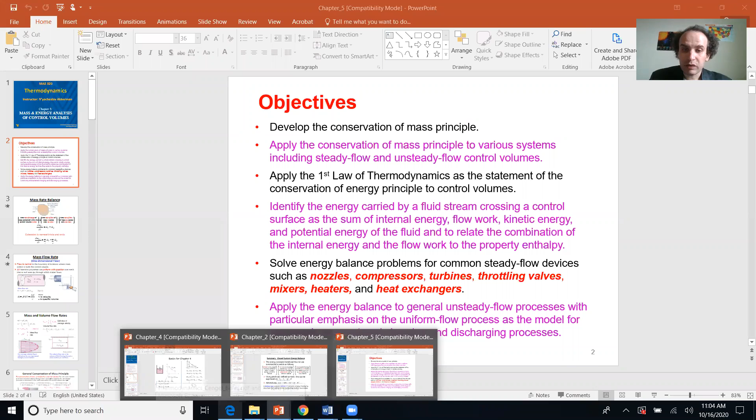So I recall how we ended last lecture. You just finished chapter 4, you just finished homework number 4. What was the major equation in chapter 4? Some people say boundary work, but the major equation was this one: delta E equals Q minus W. The change of energy between two states is heat transfer minus work transfer, or Q over cycle is work over cycle, right?

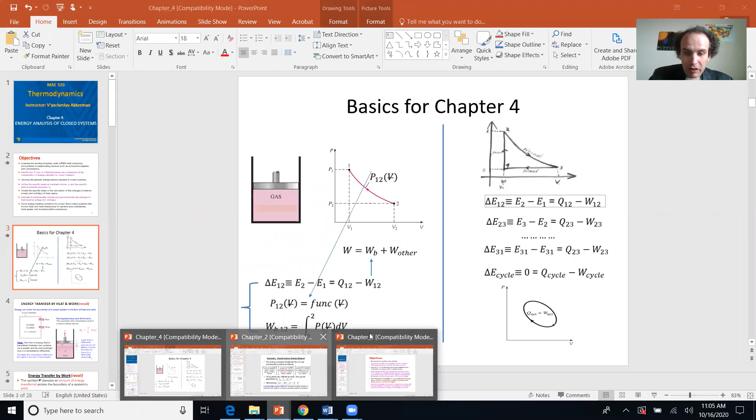Will it be valid for open systems? Now you may remember, if you recall how we came to this equation, this was how the first law was stated. It says that energy cannot be created or destroyed, it can only be transferred from one form to another. So if you have a closed system, the change of energy in that system was heat transfer through the boundary minus work transfer over the boundary, with the sign convention coming with a minus here.

So how did we derive it? We talked about a closed system here. Will it be valid for an open system? No, it will not be valid. So that's what you should realize: for an open system, the first law will look different. So you cannot use this equation anymore until I allow you.

Forget about it. Now we should derive another equation for open systems, which will account for mass transfer through the boundary. Does that make sense? So the key point of chapter 5: forget about chapter 4, forget about this equation. Chapter 5 will be a little bit more complicated, okay?

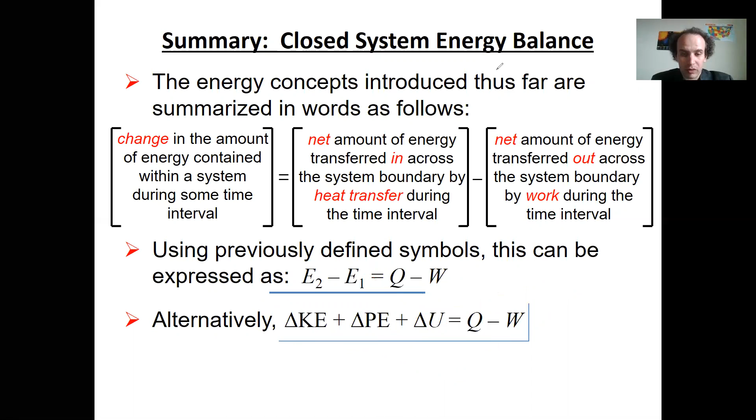Okay, so that is our objectives for chapter 5.

We need to develop the first law and employ it for control volumes for open systems. We should see how this equation will look like, and what will be moving. If you talk about an open system, it means something goes in and something goes out—it will be moving flow. So we should know how to deal with this moving flow. What will be boundary work here? What will be heat transfer? What will be flow work? What will be kinetic and potential energy? So we should arrive at some counterpart of the first law.

I'll tell you in advance that the key parameter in this chapter will be enthalpy. You already dealt with enthalpy, right? It's U plus PV, and you know why we introduce enthalpy. But now enthalpy will become your primary parameter because it's a combination of internal energy and flow work. So actually the first law will be a balance of enthalpy. I'll talk about it—not entropy, enthalpy still. In the next chapter it will be entropy. Now we talk about enthalpy, and this will be your key parameter.

So what are we going to do? Now I will go through simple things. First I will talk about something very silly, very trivial, but gradually it will become harder and harder, and it will be something very difficult. So please don't sleep, focus, and listen to me.

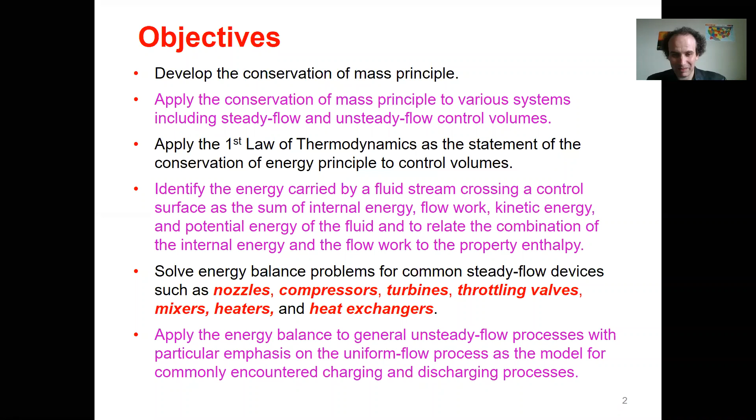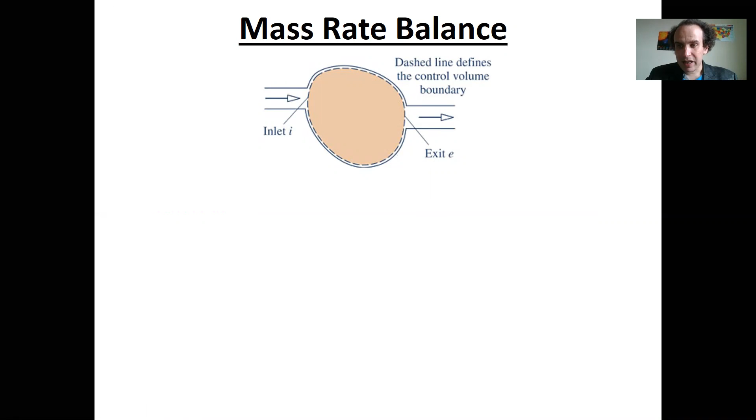So we will talk about open systems. What is an open system? It's something like this: you have a system with some inlet and some outlet. Well, I may have many outlets, many inlets. So I want to write a balance equation of mass and a balance equation of energy for it.

And what I will say here—again, in this class we say that mass is conserved, meaning mass cannot be destroyed or created. It's not nuclear physics; here mass is fixed.

So we say the time rate of change of mass contained within the control volume is what? It's the rate of mass which comes in and the rate of mass which comes out. So I can write it like this. Do you understand this formula? The dm over dt, with subscript CV meaning control volume—that's what we deal with in this course. It will be m dot i minus m dot e. Everybody remembers what m dot is? It's mass flow rate, the amount of mass propagating in and out through a unit of time.

Remember, in typical physics and engineering, we deal with flow rates. There's no reason, when you talk about moving flows, to talk about the mass of the Monongahela River. But there is a reason to say how much water propagates through Morgantown per day, or per any unit time. So that is m dot, mass per unit time, in kilograms per second or whatever.

So what I say here is very simple. Let's say, typically if you're in an in-person class, I would say: how many students do we have in the class? You may say, okay, in the room we have like 70 people. Now let's assume I want to monitor how many people I have in the class each second. What should I do? There are two options. One option is that every instant I just recount all of you. But there's something easier. What I can do: I know I have 70 people in the class.

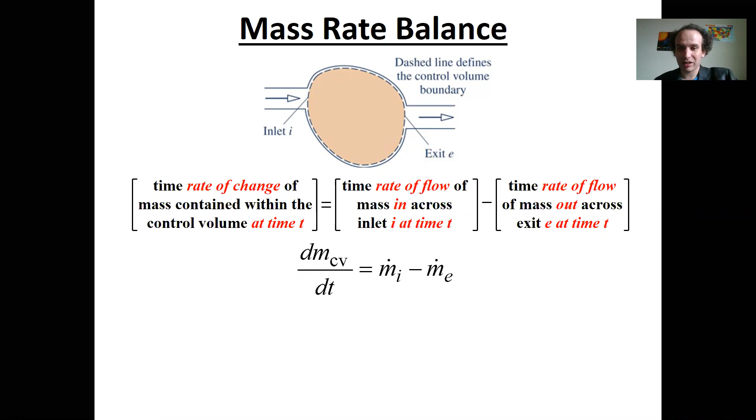But that's what we talk about with mass—mass is not generated or destroyed. So that's what we say: if you want to know how the mass of your system changes, you should account for what comes in and what comes out. And of course, if you have many inlets and many outlets, it will just be a summation over inlets and outlets.

Does it make sense? So in this class, in this chapter, subscript i means inlet, okay, subscript e means exit. Sometimes we'll use subscript o like 'out'—in and out, in and exit. Is it trivial so far? Any question about this?

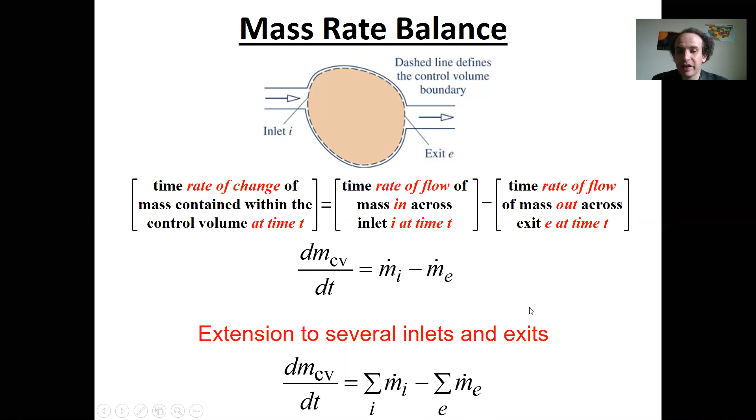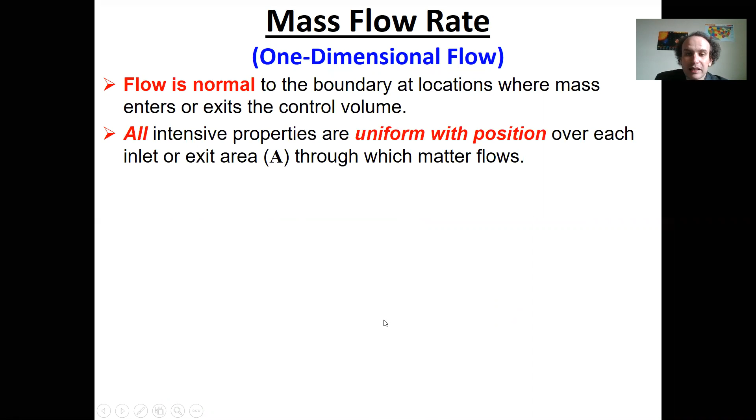This is the differential form of this equation. Let's recall what mass flow rates are. If you talk about one-dimensional flow, like a pipe, remember what mass flow rate is - this was in chapter 2. Mass flow rate is density times volumetric flow rate, which will be average velocity times cross-section area. Do you remember this formula? If I have one inlet, one outlet, you remember. Excellent. If you don't remember, go back to chapter 2.

If you have one inlet, one outlet, m dot will be conserved, while volume should not be conserved - in fact you have compression and expansion. Another way to write this is A times V divided by specific volume. So far it's trivial, I believe. And definitely the energy which is transferred, E dot, will be m dot times specific energy.

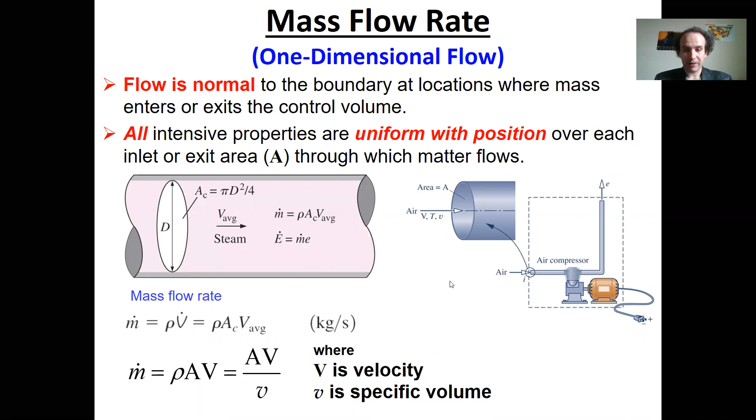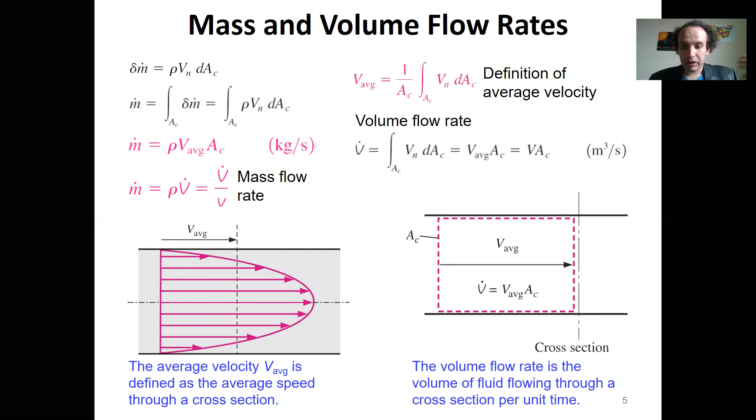Now, if you remember volumetric flow rate, there is the so-called Gaussian theorem or divergence theorem, which tells the same thing: that a surface integral can be coupled to a volumetric integral. This is physical, but mathematically it's much simpler. It's good if you take a fluid mechanics class or advanced mathematics class - sometimes they tell you that you can convert a surface integral into a volumetric one and vice versa. But you may see that what we say here is quite simple.

So let's assume you have a bath here with water. Some water comes in and comes out. What does our conservation of mass simply state? It should be trivial for any student who knows mathematics. What is the left-hand side here? What is this integral? This integral is the change of mass per unit time of water in this bath. And what is this integral? This integral is how much water propagates through the boundaries, through the tube and through the exit, plus and minus. Together they give you 0, because mass cannot be destroyed or generated.

So what we say here is that mass cannot be created or destroyed. The change of mass inside the system equals what comes in minus what comes out. Coming back to my example about students in the class: the change in the number of students in the class equals the number who drop the class, minus that, plus the people who enter the class belatedly.

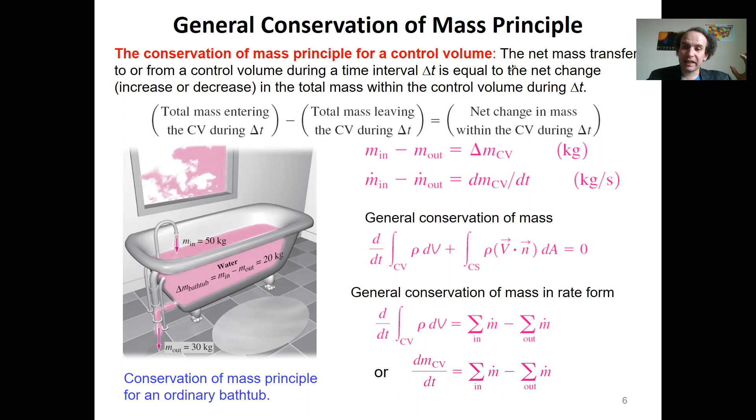Otherwise, if this term is not 0, then your system is unsteady and it changes. Unsteady systems which depend on time we call transient - transient means time dependent. So if you have a transient system, you can take this equation and integrate it over time, and you'll get this: integrating in time by dt, mass of my system at time t minus mass of my system at time 0 equals this.

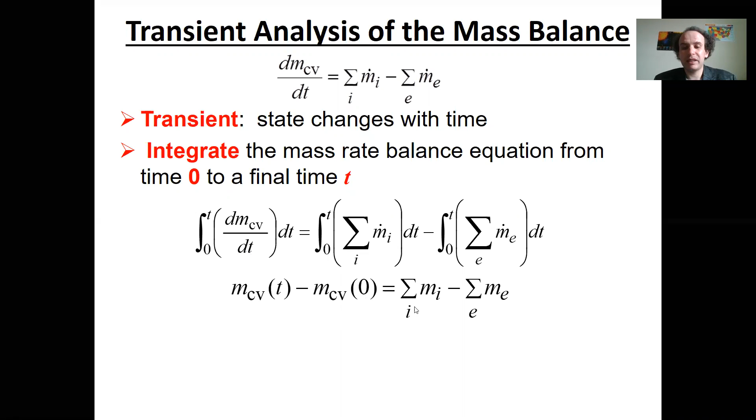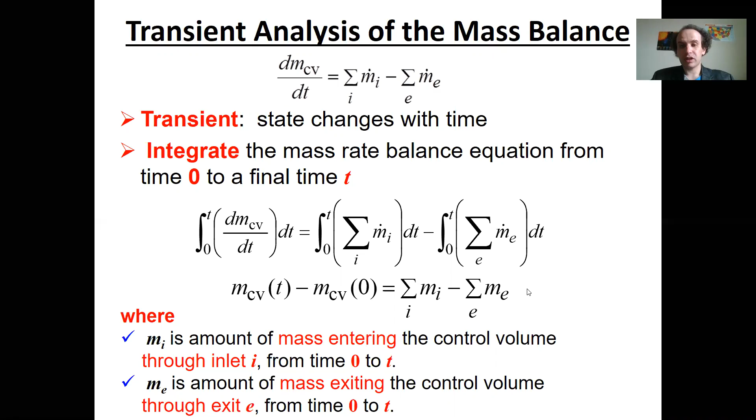It's a summation. Again, if I have a steady system, the left-hand side will disappear. Most of the systems we deal with are steady - otherwise they would explode. Turbines, compressors, they should be steady because you have many rotations per time. If they were unsteady, they would overheat. So most likely we'll deal with steady systems, but not all the time. In the last problems of your homework, there will be systems which are not steady.

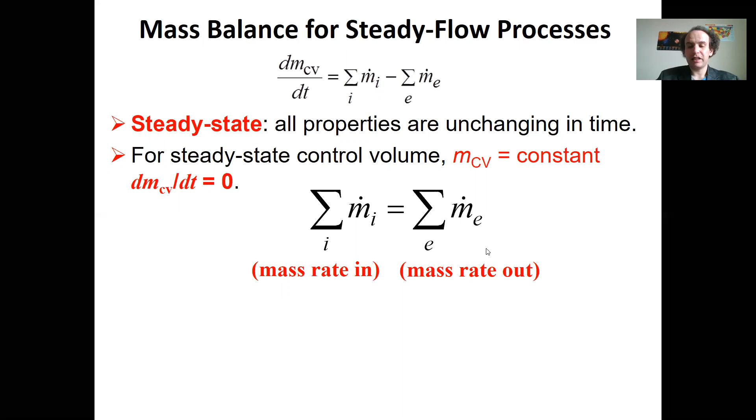So again, if I talk about a steady system, what does it mean? It means the left-hand side here is 0, as I discussed. So we don't have this left term, which means this will be my mass balance equation. If I have many inlets, many outlets, I have it like this.

Right? Does it make sense?

For example, if you have mass balance for a steady flow, classical example, let's say I have a system like this. It's a classical mixer. Assume you take a shower and you have hot water and cold water and you want to balance them to make a reasonable temperature for you. So here is one flow with mass flow rate of 2 kilograms per second, and here is 3 kilograms per second, another flow rate. So you definitely understand that the outlet will be 5 kilograms per second, the summation. So what we say here, it's just mass balance.

Because what goes out should be equal to what goes in. Otherwise, if it's not steady, the amount of water inside will grow or disappear, and it will be unsteady. Does it make sense for you?

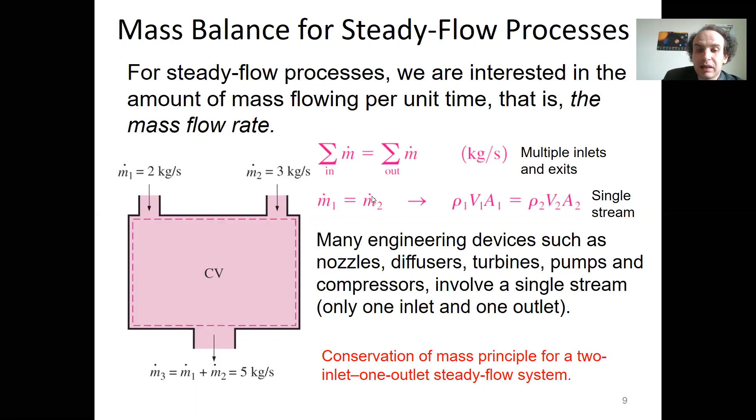As it should be. But if you have incompressible systems, like liquid water for instance, then definitely volumetric flow rate or density will be the same. As long as density is constant, volume is also conserved.

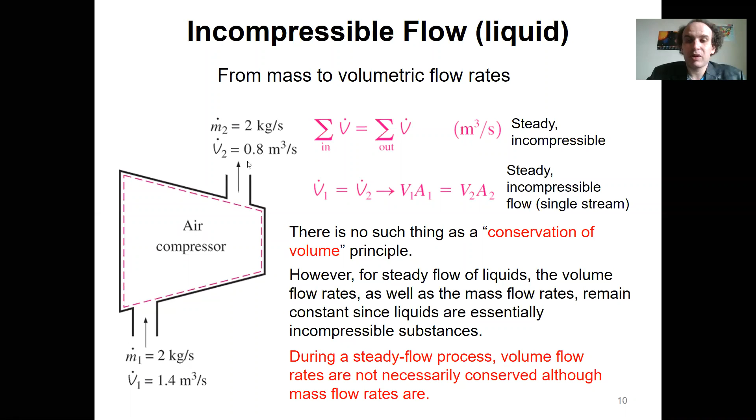But if you buy a balloon or some kind of vessel with gas, gas occupies the entire volume. So if you buy 1 gallon of hydrogen and spend some amount of it, you will still have 1 gallon of hydrogen, because it will occupy your volume. Hydrogen is expanding, so mass will be conserved, volume will not be conserved, right? Is it trivial what I talk about?

I hope so. Another point, remember the concept of flow work or flow energy, PV. What is this term PV? I recall it again because sometimes it's really not easy to understand. I am explaining this term.

Assume like now we are lucky if you want to drink water, you go to the kitchen or bathroom, open the crane and you will have water there, right? But somebody brings it into your home. There is pressure abundance in your pipes, in the canalization system, in the piping system, in the plumbing system that moves it to your home. Imagine you don't have water in your home. What should you do? Then you should go somewhere outside to some source of water, take a vessel of it and bring it home.

And then you should take it out from home. Do you understand that you should produce some work for it? If I ask you, here I have a vessel with 10 liters of water, please help me move it out, then we should take it and bring it out. Do you agree that we should produce some work to push it out? Do you agree that somebody produces work to bring it here? So now you may realize that when you open your crane and water flows there, somebody did this work to bring it here. Do you agree? This is what we call flow work. This is the work associated with moving flow. And this work is equal to PV. This is the PV term. It's important for us because it will form enthalpy.

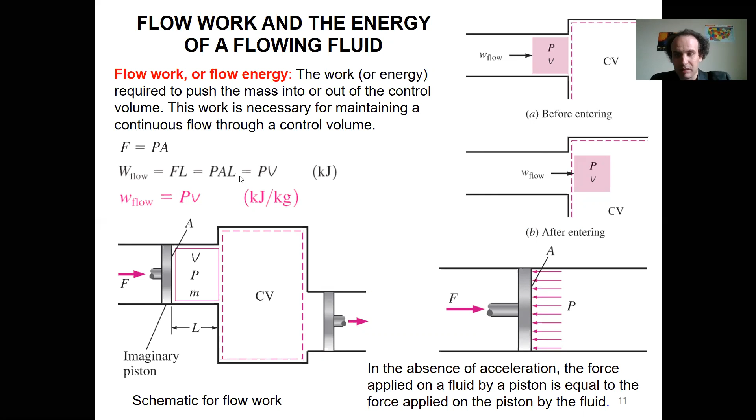So now let's compare what we discussed before. When you consider non-flowing fluid, fluid at rest, remember what mechanical energy consists of. It's internal energy, which we call U. Here we talk about specific values - they are small values, but if you multiply by mass, you get total values. So this is internal energy, this is kinetic energy - specific kinetic energy - and this is potential energy, remember chapter 2. So this is for non-flowing flow.

Now for moving flow, for flowing fluid, in addition to those terms, you will have flow energy or flow work, which is PV. Please realize that on one hand this is related to the process, but on the other hand it's a property, because P is a property and V is a property. If you multiply by mass it becomes capital PV; per unit mass it's small v. So this value theta is the mechanical energy associated with moving flow.

So do you agree that this value theta is the counterpart, the analog of E, for moving flow? Do you agree that this is for flow at rest and this is for moving flow? So we have this term PV there.

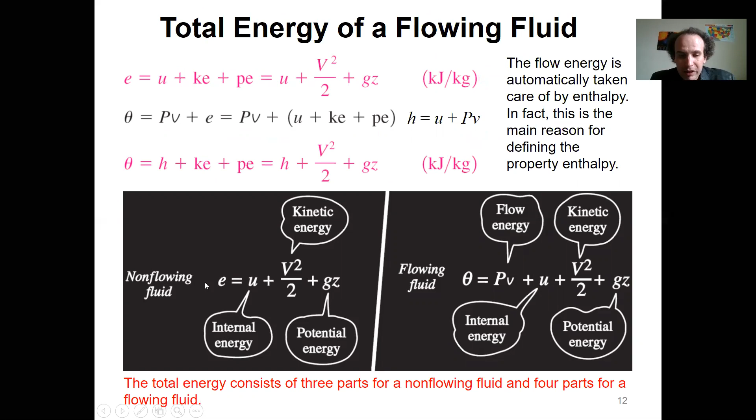So that's what I say here: you realize E is specific mechanical energy of flow at rest, and theta is its counterpart for moving flow. Now, if I multiply both by m dot, what will I have? I'll have the value for moving flow - the actual energy of moving flow, which will be m dot times theta. This is the amount of energy transport, and this is the amount of energy transport per unit time.

And I recall again that we mostly talk about the second equation, because there's no reason to talk about the first. If I ask you what is the energy of the Monongahela River, you don't know what I mean by energy. But if I ask about the energy of water in a hydropower plant, and what energy is generated per unit time - its power - then it makes sense to calculate. It will be m dot multiplied by h. Do you understand this?

Please ask me something. Also, you will realize in this course, and I'll tell you in advance, that very often the term h will be much higher than these other two terms. Very often we will neglect kinetic energy and potential energy. Now I want to tell you something I'll repeat many times - there's one more classical mistake that many of you may make. Here we have three terms: specific kinetic energy, specific potential energy, specific enthalpy.

What are the units of this value? Where do you typically get units for this? What is the unit for enthalpy? If you open tables, you'll see enthalpy is in kilojoules per kilogram, correct? Kilojoule per kilogram, okay?

So what am I going to do next? Next, I am going to show and derive the first law of thermodynamics for open systems — energy conservation for an open system, for a system with moving flow. Very similar to what you did for a closed system, but with other terms now. So to do it, I will talk about energy balance, energy rate balance.

So what will be here? Let's say I have my system — this is my control volume, this is my inlet, this is my outlet. And we realize here that mechanical energy goes in and out here, right? So now I will say: what is the rate of change of energy in the system? It will be heat transfer through the boundaries, minus work done by the system, work transfer.

And up to this point, I'm still exactly where we were in chapter 4. But also, so we have this term. If I don't have this term, do you agree that up to now I am in line with chapter 4? What happened so far was chapter 4, right? But now we have this term.

So we will have mass transfer. So let me write this down. So I will write now: d over dt is equal to q minus work. And what do I write here? Plus mass energy transfer through mass in the inlet, minus mass transfer through the outlet. Do you agree with this?

But if my system is open, as it should be, then I do have these terms, and these terms dominate over heat and work transfer. They are my major terms, they are big terms — do you see? Okay, now, questions please? Yeah, that makes sense. Excellent. But that's important, and that's what you shouldn't confuse. Now you may realize that if you forgot about this term, you would fully confuse your problem and never solve it, right?

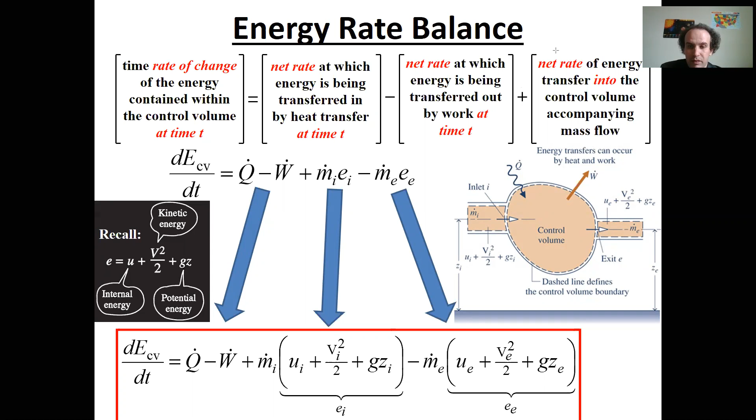Now, let's proceed. So that is my equation, let me rewrite it here. Let me call it equation 1. Now let me say something else. So basically, this is what we have.

But let me ask you, what is W here? Q is heat transfer, but what is W? In fact, you will realize that W here is not just work done. It will be work done inside my system, plus work done by inflow and work done by outflow. Do you see? So in fact I do have these two terms here, plus this term, and this term, right?

What are these terms? These terms show flow work. We are lucky in the 21st century that you can drink water, get water from a crane at your home. Imagine you should go to a river to pick it up, then you will really realize how heavy you are. So pressure, your pump, our city provides this work for you, but these terms are here.

So generally speaking, work here contains work inside the system plus work transfer in and out through mass. So what happens if I take this equation and substitute it here? Will you see what happens? Let's discuss it.

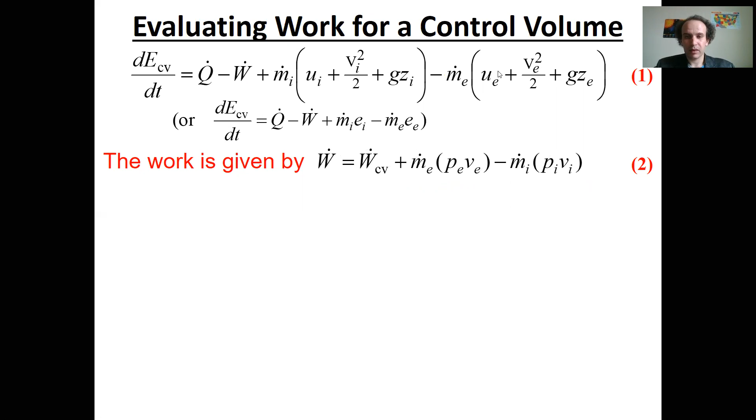This is work in and work out. So if I substitute here, that's what I will have. Do you see that my equation can be rewritten like this? So if I substitute, my term PV will come here. Do you see it? What I can write now, what is E plus PV? It's what we call theta terms. And my E term, it's U plus V squared over 2 plus gz.

So please take a look, on this equation and this, it's exactly the same equation. So what do we see here? Take a look: what I say here is that my change of energy inside my control volume per unit time is my Q dot CV, which is heat transfer rate per unit time, minus work done inside my system, by the system or on the system inside it.

You see the difference? Now this term CV is different from this term because here it was general work. Here it's work done inside the system. And what else do I have? I have this term, when I have E plus PV, right?

And what do these terms mean? Do you recognize it will be what we call theta terms before, right? These terms are theta, which correspond to flow, moving flow, E plus PV. Remember how we introduced this? And why do I say this? Because remember that for theta, enthalpy plays the role of internal energy. So you know what I'm going to do next?

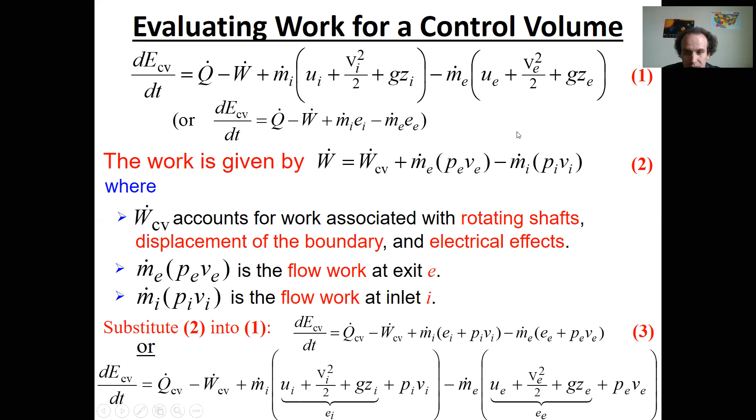So what I have here, I just rewrote this equation like this, and now these terms U plus PV form enthalpy. So that is what I have. So in fact, now I have exactly the same equation, but now in terms of thetas, in terms of enthalpy. So here is my equation.

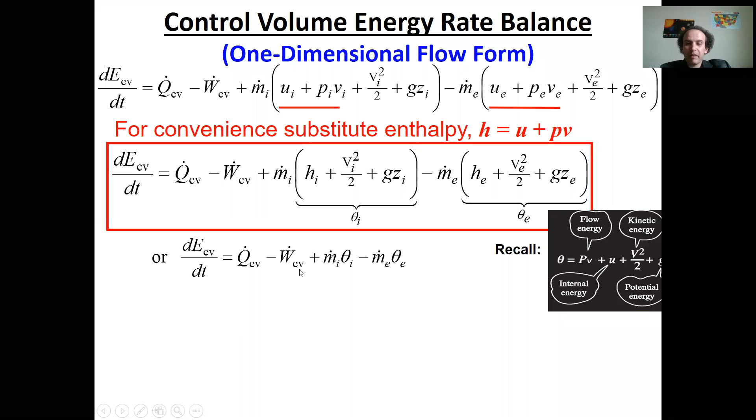If I have many exits, I will just have a summation, and I will have like this. So the equation at the bottom that you see, this is your major equation for this chapter. So please take a look and ask me questions. The equation you see at the bottom in the frame, d over dt is Q minus work, and this - all equations, let me write it like this. So this equation is your major equation for chapter 5.

Do you understand all terms here? Do you understand what we are talking about? I hope so. Please take a look at this equation, and let's think together about what it actually means. Like I said, it actually means balance of theta terms because we talk about moving flow. So what you see here...

Again, I recall, if I don't have mass transfer, if my system is closed, what does it mean? It means that m dot is 0. Do you understand? So it would mean that these terms will go out.

So if these terms go out, what do you see? You see exactly the same equation like in the previous chapter. So what does it mean? It means that this general equation you see here, in fact, is not just the first law for open system. This is the general form of the first law of thermodynamics. It describes any system, closed or open. If the system is closed, it's like this.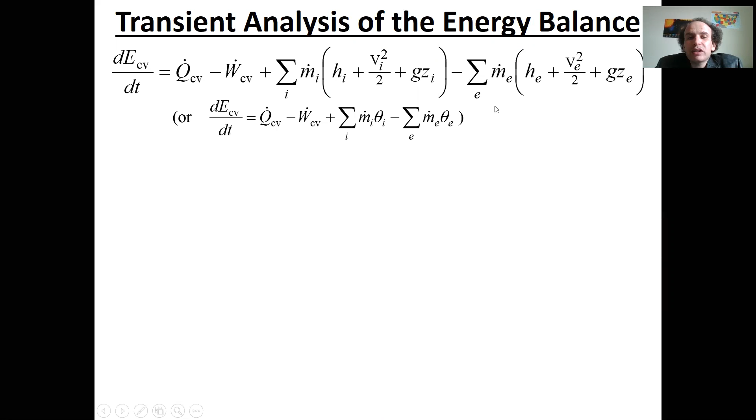Before talking about this, let's first consider a transient system. So if I have a transient system, then my left-hand side is not 0. So then I will integrate like this, and this will be my general equation. So if my system is not steady, and you neglect kinetic and potential energy, this will be your general equation. This will be your balance between U and H. It will be like this. And one of the problems will be like this for your homework.

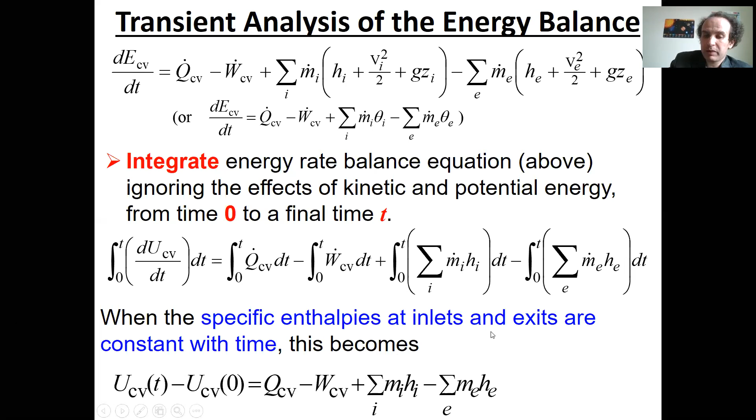But if your left-hand side is 0, if your system is steady, then what? Then do you agree that you come to this equation that you see on the screen? Well, let me ask you, where is energy in this equation? Where is U in this equation? You don't see it. You don't see it, but it's there, right?

Now, please remember what enthalpy is. Again, enthalpy is a combination of U plus PV. It's not energy. Energy exists in reality. Internal energy is really something that you have in your body, that you release. Enthalpy does not exist in reality. Enthalpy is some term which helps you solve the problem, that you take from your table. So it's not conserved, it can be generated or destroyed. There may be a source of enthalpy. So this is not conservation of enthalpy, it's a balance of enthalpy, but it helps you solve the problem.

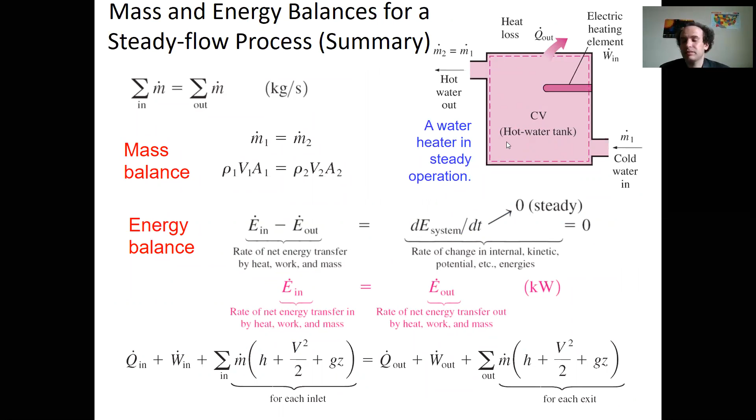Okay, please ask me some questions about what we discussed.

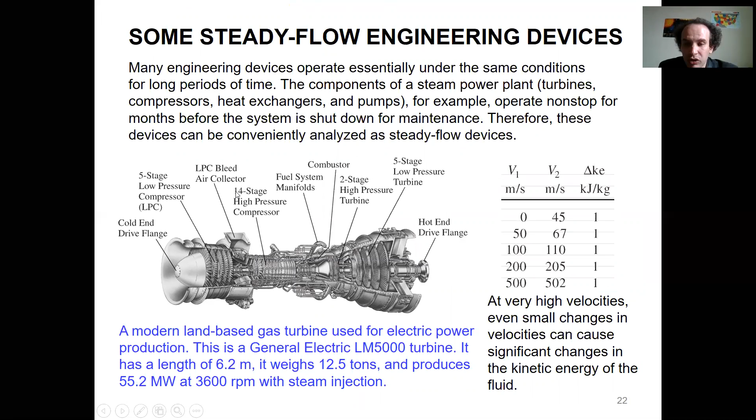What we are going to do next, for the rest of this section, we will talk about particular devices that we will consider. In general we have to talk about very complicated devices, but we will talk about nozzles, diffusers, turbines, compressors, heat exchangers, mixers, throttling valves, and you will see how this equation looks for each. What terms you can neglect, what terms you will be counting - that's most important. So that's what you should remember from here.

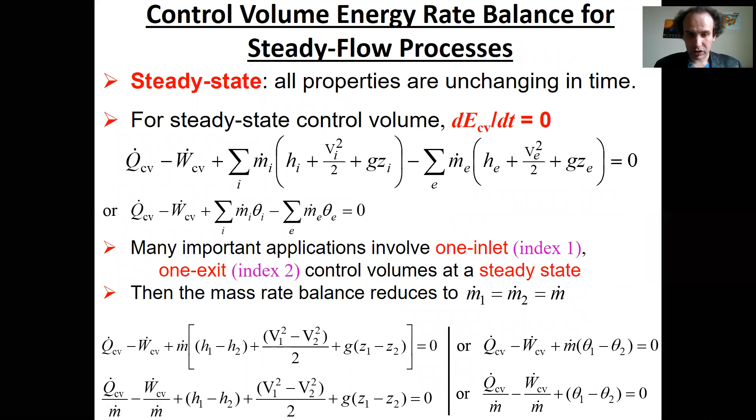You remember how we derived this equation. That is your major equation. All the time, write down this equation and see what terms to use. Okay, I will stop at this point. Please ask questions, do you have questions?

Exactly, yes. dE over dt equals 0 means that your system is steady. If it's not steady, then this final term remains and you should integrate. Most of the systems you will consider will be steady.

So what you should remember from today and from this portion is that, basically, an open system is conceptually different from the closed system. The first law for an open system looks as follows, as we derived. It's an extension of what we had before. The equation that we used in chapter 4 is just part of it, it does not work anymore. Inlet and outlet now are for the same system, and so state 1 and state 2 now coexist.